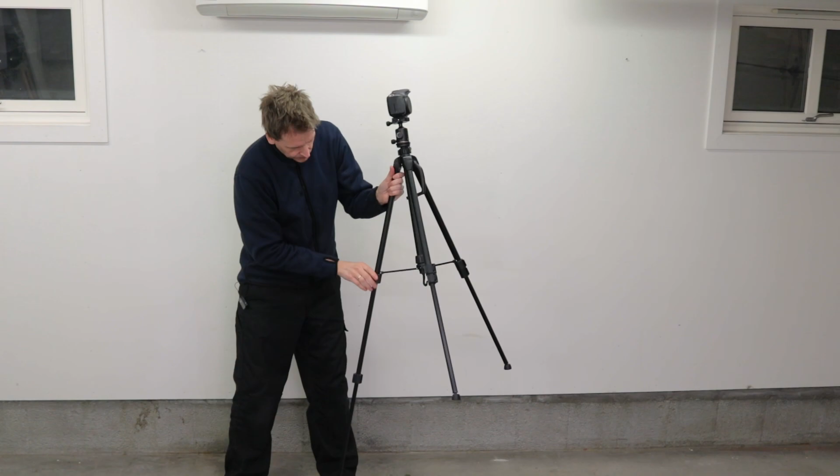Here you can see me put it on the highest position. If I want to go lower than this, and here it is in the middle position. And this is the lowest position with this tripod. If I want to go further down, and sometimes I wish I were even lower, I can of course bend these legs.

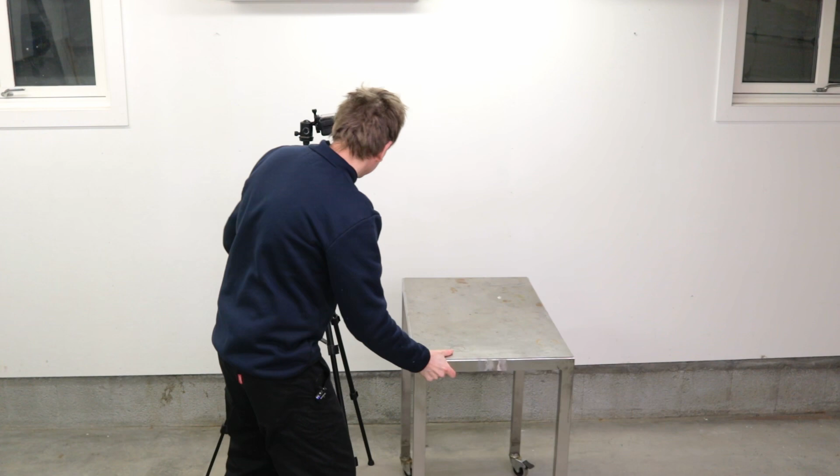But now it's starting to get cumbersome to get the angles I would like with my camera. And then maybe I want to do an overhead shot. Yeah, and I wish I could come higher up as well. It takes some time, especially when you're going to do this hundreds of times during a video.

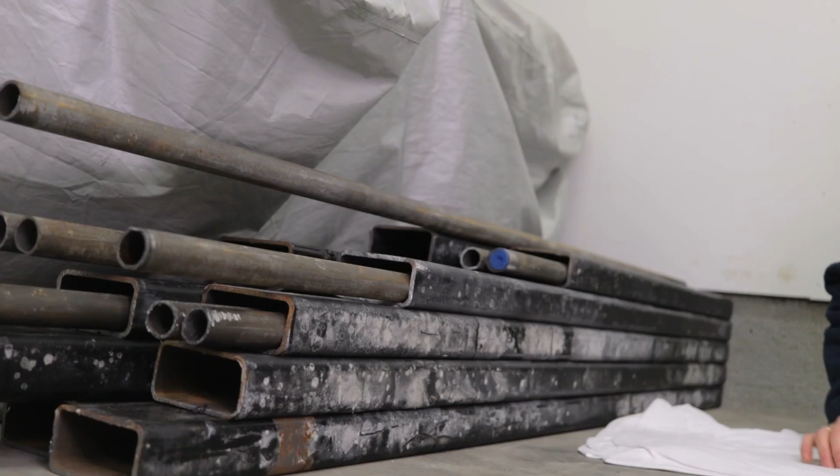So what I want to do is build my own camera stand. I know you can buy these in all kinds of variations, but normally for professionals, and they are very expensive. I am no professional and I can't afford them.

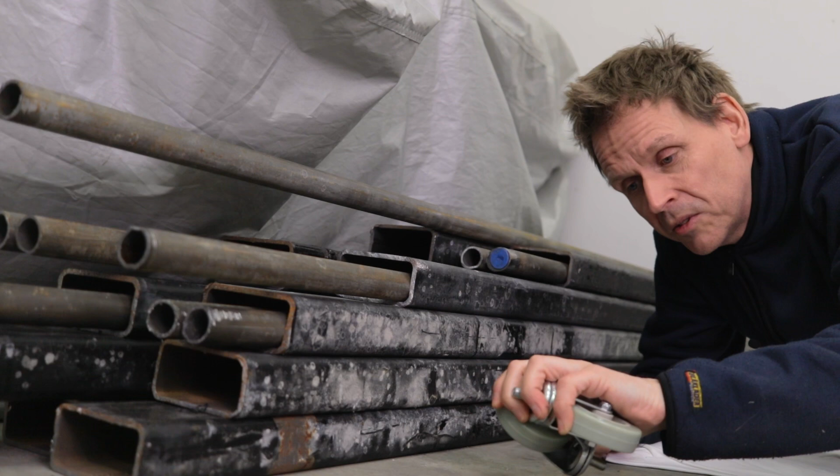So what I can afford is to use this scrap metal. I got it for free. It's quite heavy, thick steel, and I can weld it together. So yeah, I will try to make it myself. I also have a couple of wheels left over from a previous project, and I bought the third wheel, so my total cost so far is $5.

But I need a plan, so let me take you into my office and show you what I've done when it comes to planning.

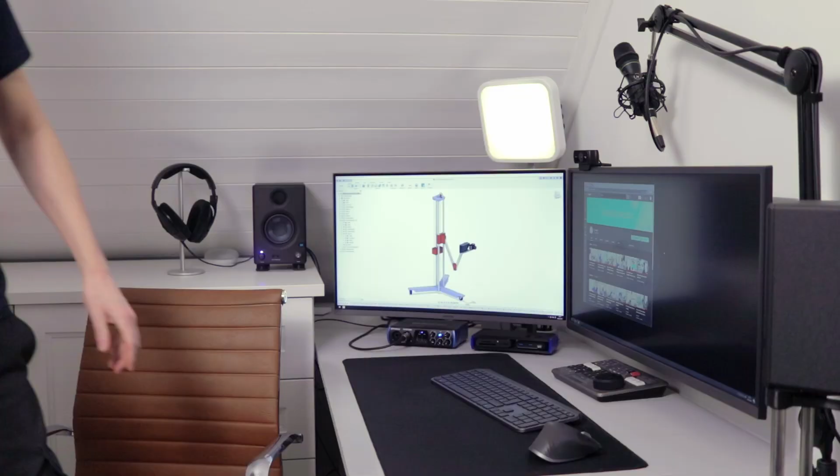Since there will be a lot of moving parts on this camera stand, I thought it was best to make a 3D model first on my PC. Let me show you, and here you can see my design. It will not be painted in these colors though, they are just here for visibility.

But let me start with the foot. I will make 3 identical parts with the wheels at one end and weld them together at the other end. This should make it easy to move the camera around in the garage.

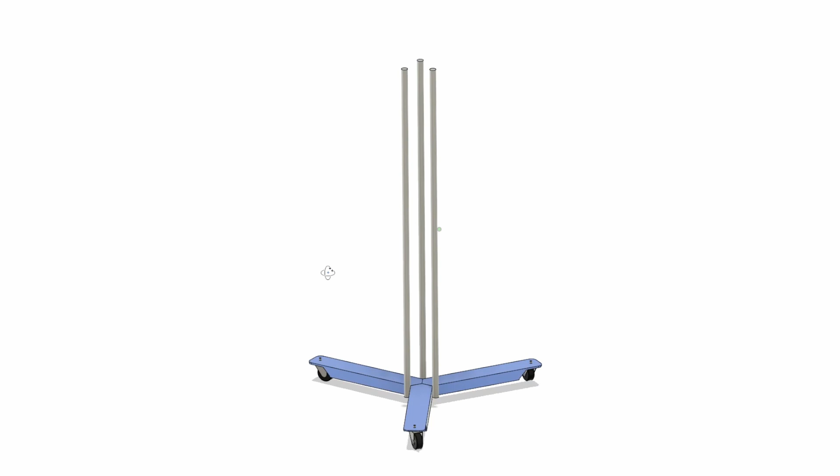The vertical stand will be made using 3 steel pipes connected on top with some kind of lid. And then the main bracket, I will make some holes in it so it can slide up and down along the 2 pipes.

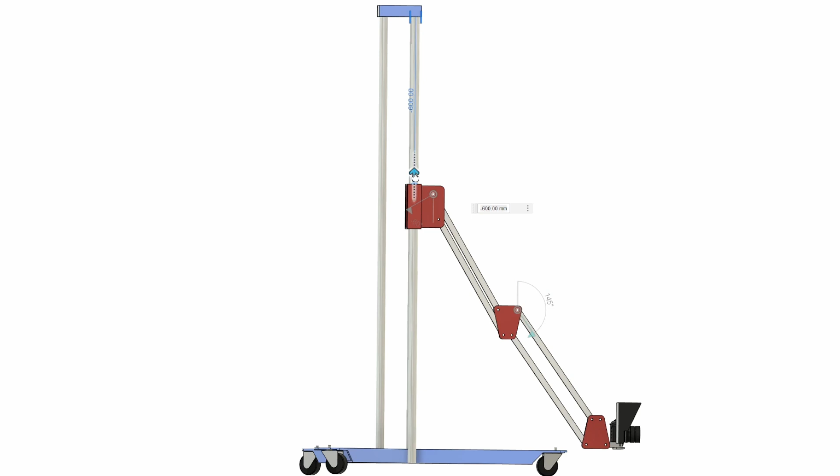The next component is a self-made articulating arm, and the camera and monitor will be attached at the end of it. It will have both horizontal and vertical movement for fine-tuning the camera position.

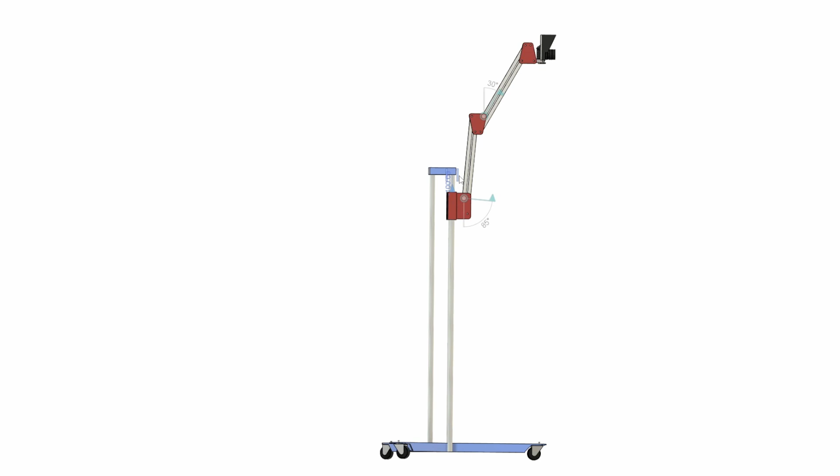And when combined with the slider, I will be able to go all the way down to the floor and up under the ceiling. I have also made it possible to move the camera sideways a bit, so I don't have to move the whole stand for small adjustments.

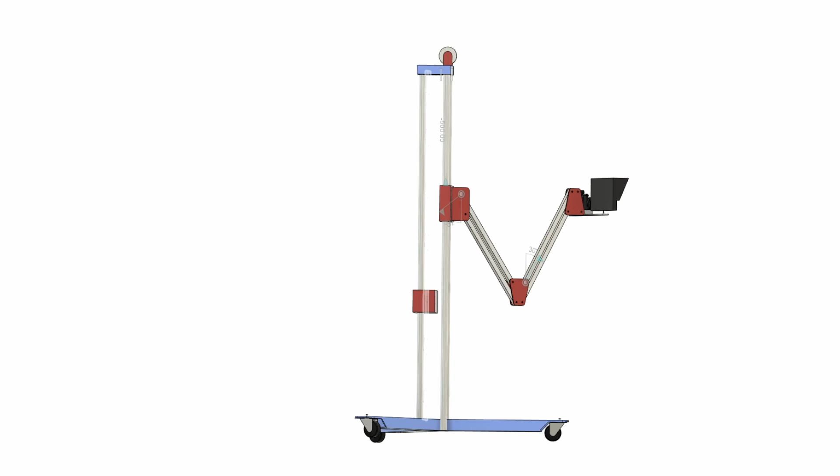The arm, camera and monitor will be around 4 or 5 kilos in total, so to make it smooth to move the slider up and down, I will add a wire to it that goes up to a pulley and down to a counterweight behind the vertical stand.

And that was the plan, and now it's time to put it to test. Talking about the vertical stands, I 3D printed these 2 parts that I hope will be useful when I'm gonna put them on to support them. Let's see if this comes in handy. But it's time to get back out to the garage and start the metalwork.